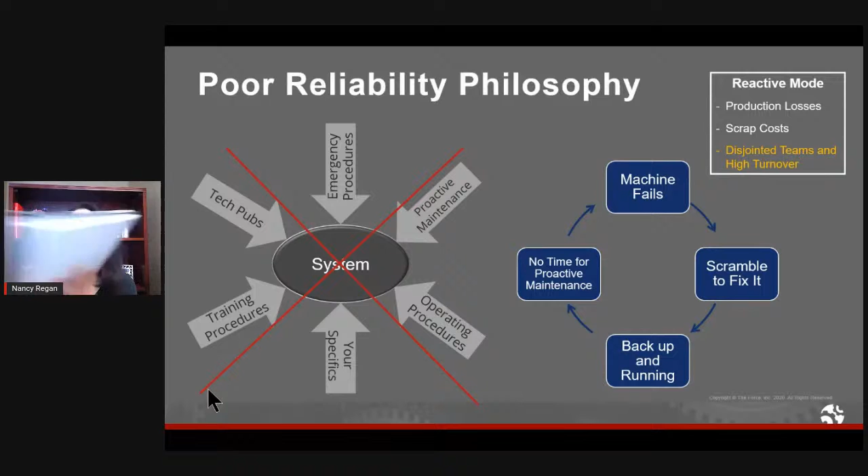Okay, so yesterday what we discussed is that reliability-centered maintenance is a philosophy, that it is not a maintenance program, it's not a software application, it is a philosophy that you can use to come up with your own failure management strategies for your equipment.

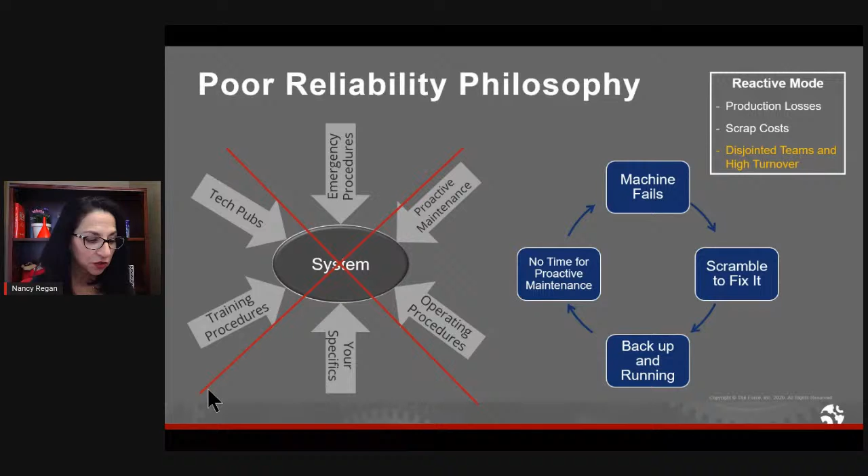And one of the things that we talked about is, why isn't reliability-centered maintenance used more widely? You know, we're celebrating the 42nd birthday of it, but I still come across people who maybe are just hearing about RCM, or maybe they've heard about it, but they don't quite understand the principles as they were originally intended to be implemented. And this is not their fault.

One of the reasons, I think, is because RCM has been done poorly at times over the years, and so sometimes RCM gets a bad rap. Put in the chat if you've heard like RCM takes too long, you don't get the results you need, etc. All that is not true. I can promise you that.

But the other reason is because of this. It's that reliability-centered maintenance takes time. It takes time, it takes commitment, and it takes resources. Now, can you do it cost effectively and efficiently? Yes, absolutely. But it isn't free. Just like anything, right? We know the laws of thermodynamics, there is no free lunch. If you want a return, then you have to make an investment. And reliability-centered maintenance is one of the best investments you can make for your equipment.

Something else we talked about is that you don't have to do reliability-centered maintenance on all of your equipment. You can just do it on select pieces of equipment. In fact, we all live in the real world, right? So if we're going to get real and serious, I'm not going to stand here and tell you you have to do RCM on all of your equipment, because you don't have the time and you don't have the resources to do it on everything. And we don't necessarily have to do RCM on everything to get benefit.

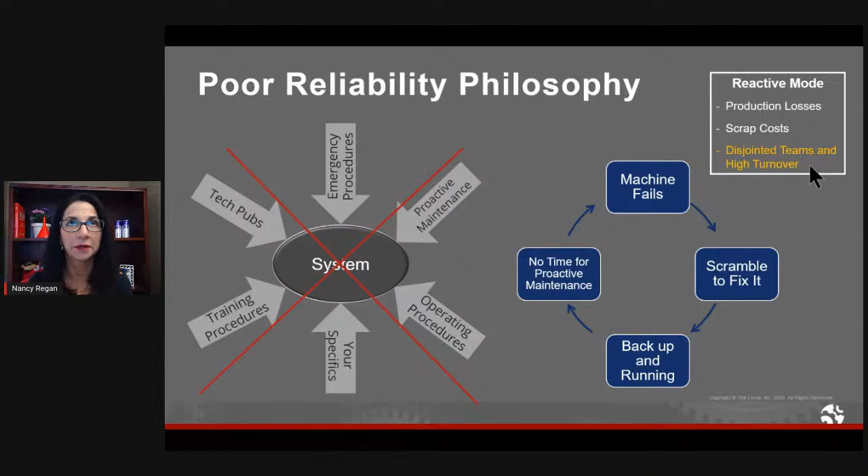But another thing, it isn't necessarily a physical thing that you can put on a balance sheet, but we end up with disjointed teams and high turnover, right? So we've got valuable staff members. They've got information in their head. They have an understanding about our organization, but the culture, right? We hear a lot about a reliability culture. We're all in this reactive mode. Everyone's running around. We're not taking care of reliability the way that we need. So then good people leave our organization and they take the information in their brains with them. So that's another big consequence of disjointed teams.

Now, when we take care of reliability the way we need to, when we have a good philosophy, and reliability-centered maintenance is part of that effective philosophy, then we get what we need from our equipment. And in a nutshell, that's what reliability is, right?

If our compressor is running and it does not chronically fail, if you ask somebody on the floor, hey, what do you think of that compressor? They'd probably say, you know what, it's pretty reliable. I mean, that's what reliability is. That's a very simple view of it. But I think it's very important to have a simple view of reliability, because then we can get into the weeds and get into the nuts and bolts of what we have to do. But that's what reliability is. It's getting what we need from our equipment.

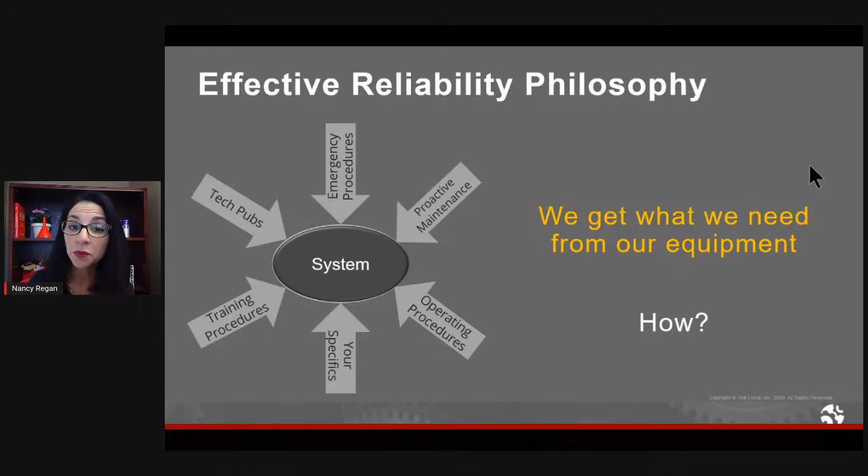So how do we do it? Well, reliability-centered maintenance is one effective way. It's one piece of the puzzle. It's not the answer for everything, but it's an important piece of the puzzle. Now, it consists of 7 steps that you can see here.

Oh, let me get my mouse right. I'm using 2 screens, and sometimes it gives me fits.

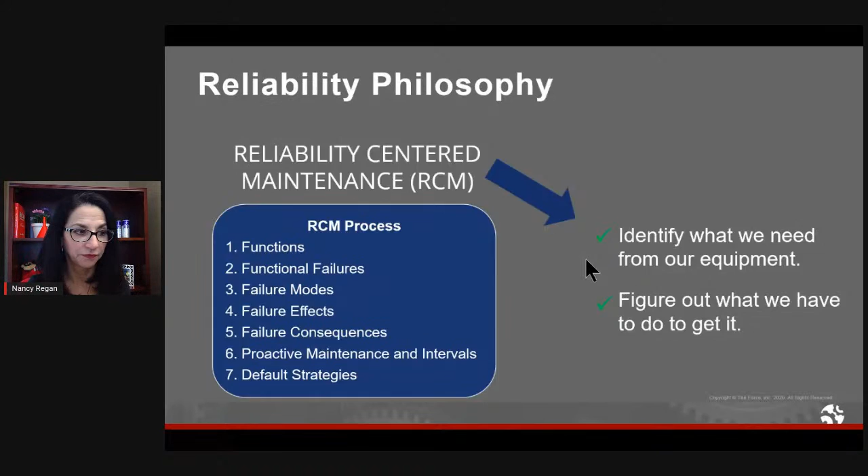There we go. You can see the 7 steps here, right? But if I were to tell you what RCM is in a nutshell, number 1, we use it to identify what we need from our equipment. In other words, we get very specific about the reliability that we need. And number 2, it helps us figure out what we have to do to get it. That's reliability-centered maintenance.

Now, why don't more organizations use it? Another reason is because it takes time. It takes investment. It takes resources. So a lot of people, when they don't understand it, they think of RCM, they think of proactive maintenance as a cost center and not a profit center. But here's how I'd like to boil it down. Just think of ourselves as human beings, right? And the way that we eat.

If we go through McDonald's every day for lunch or dinner because it's fast, because it's easy, and because it takes little effort on our part, if we eat a Big Mac today and a large fry and a Coke, it's not a big deal. But if we do that every day for lunch, maybe even after a week, it's not even a big deal. But as the months go by and as the years pile on, that's going to be very bad for our health, very bad for our weight, very bad for our psyche.

Now you're trying to put on your pants and they're too tight. I mean, nobody likes that feeling. That's just an ugly feeling. Then we feel badly about ourselves, and it's like everything just starts to spiral. It's the same thing with reliability, right? So making a salad takes longer to prepare. You have to wash the lettuce and peel the carrots and wash them. Same thing with the cucumbers and the celery. And I like to put apples in my salad. Maybe some fresh herbs, some fresh parsley. You've got to wash all of that.

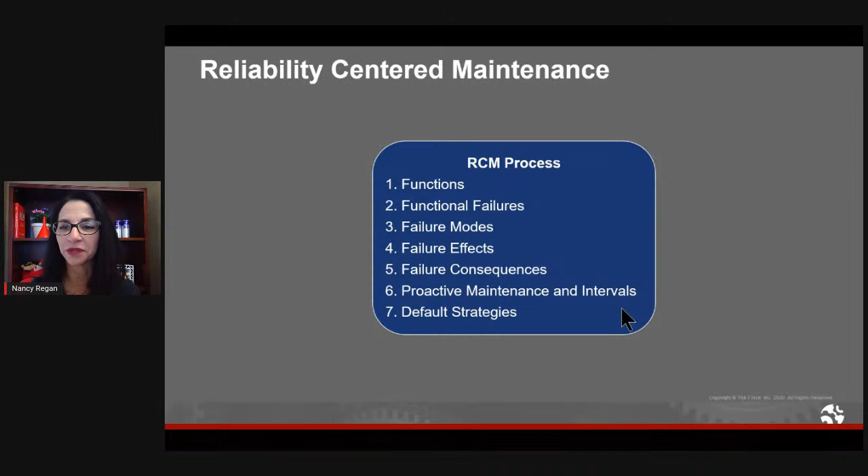Okay. So to debunk a few misconceptions, one of the questions yesterday is, what is the difference between FMEA, or failure modes and effects analysis, and RCM? Which one should I do? Here's the thing. RCM is one-stop shopping for a lot of things. Steps 1 through 4, functions, functional failures, failure modes, and failure effects, make up the FMEA. So if you're doing RCM correctly, then the requirement for an FMEA is largely satisfied. When we do step 5 in the RCM process, that's failure consequences, where we assess the consequences of each failure mode.

Well, steps 1 through 5 make up our FMECA, our failure modes, effects, and criticality analysis. And then embodied in step 6, when we figure out what proactive maintenance we should do, included in that is condition-based maintenance. So I also hear, should I do RCM or should I do CBM? Well, you see, when you do RCM correctly, you're already considering condition-based maintenance. So it's all wrapped up in it.

Now, something else that we talked about yesterday is I likened reliability-centered maintenance to a funnel. And I'd asked the question, have you ever tried to replenish your oil reservoir, or if you change your own oil, when you service the reservoir with oil, have you ever tried to do it without a funnel? I had to pull over one time and add oil into my 2014 Subaru, and I didn't have a funnel, and it was messy, right? Well, reliability-centered maintenance makes it easy for you to come up with a proactive maintenance that's technically the right thing to do and that is worth doing.

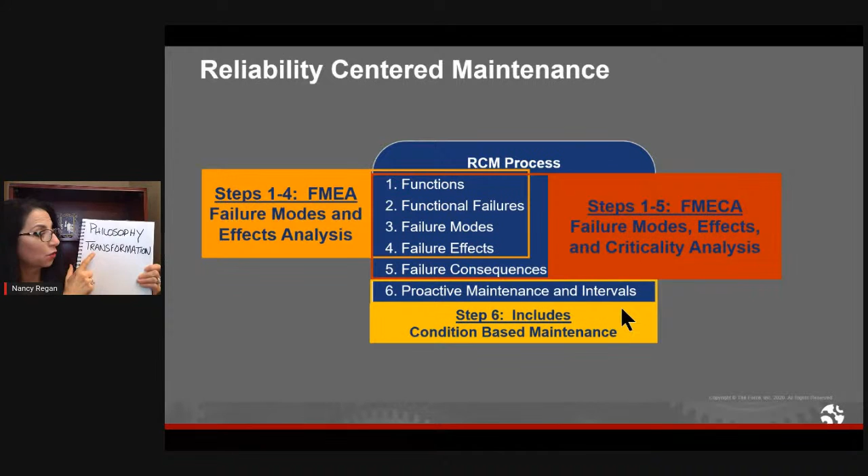Reliability-centered maintenance is the technical love of my life, and it is because it's just no joke. We talked about yesterday, the 2 words of the day were philosophy and transformation, and when you do RCM correctly, it can quite literally transform an organization. I've seen it firsthand, and I actually have an example to show you.

The way that I started doing reliability-centered maintenance, as I shared yesterday, is that I was a civilian employee with the Naval Air Systems Command, and one day in August 1997, my supervisor, Fred, called me into his office, and he said we were tasked to do reliability-centered maintenance because we needed to reduce our maintenance costs. So our reliability was okay, but we were spending way too much money on maintenance. So we started doing reliability-centered maintenance on our mobile support equipment. And our goal was to reduce maintenance.

Now, can RCM reduce maintenance? Yes, it can, if you are already doing way too much maintenance, or you're doing maintenance that you don't need to do or that you shouldn't do, okay? So if you are working in an environment where you're doing very little proactive maintenance, but you've got chronic failure, well, you may drastically increase how much maintenance you do, but then you may decrease your unplanned failures, and you will decrease all that other stuff like lost production costs. So it really depends on what your goal is and what your current circumstances are.

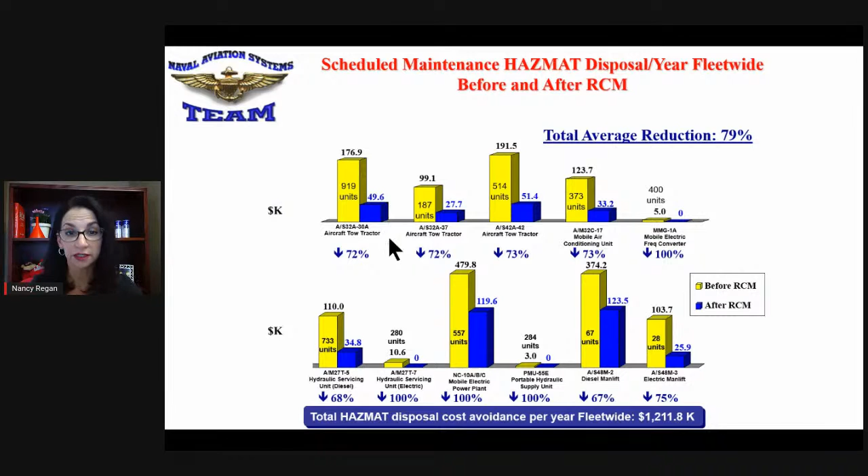And the point to be made here is that we didn't harm our reliability. We didn't have all sorts of chronic failure occurring because we reduced the maintenance. So really that was confirmation that we did it right, that we chose properly how to manage all of those different failure modes that we had analyzed. So that's just one quick case study, one that is near and dear to my heart because it's where I first started my RCM career and where I started to learn my craft.

Okay, let me share just something else with you. Something else to note is that another reason for the big reductions is that there were problems with the current maintenance plans, like they were typically written by the equipment manufacturer, and oftentimes the manufacturer doesn't know how often we use something or where we use something, right? So we always have to sanity check a manufacturer's recommendations.

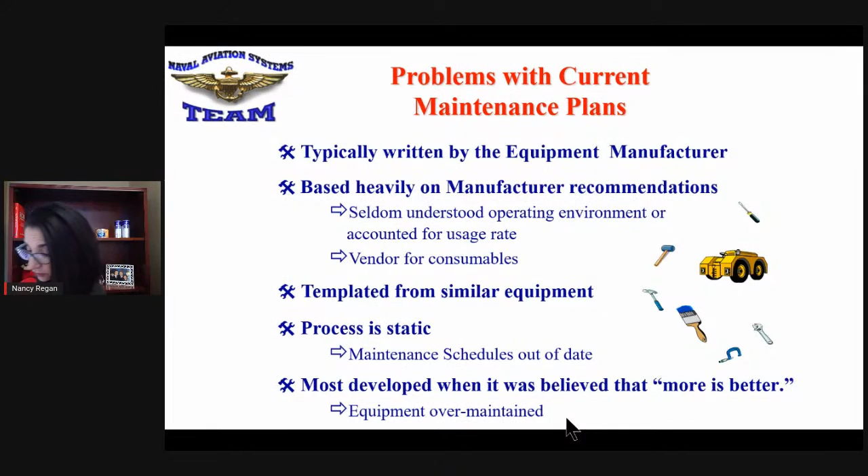Okay, let's see. And if I can just say something I'm super proud of, in 1999 we won the Logistics Team of the Year award, and in 2000 our team won the Department of Defense Value Engineering Award, and we were really excited about that one because that one was a really big deal.

So anyway, I say our team because another thing that we talked about yesterday is that when you do reliability-centered maintenance, the way to do it is with a facilitated working group approach, right? Because I've never seen any organization that has all of the historical data that they need to make meaningful decisions about physical assets. So whatever data you have, it's good to augment it with real world data. And that is the stuff that's in the minds of the equipment experts.

So this whole RCM success story or case study, I certainly do not mean to stand here and say, oh, this was all me, because I was just the facilitator. This was a huge team effort, right? From upper management, middle management, all the way to our RCM team, and then our working group members, the people in the fleet who participated. It was an incredible effort, and like I said, it's still going on.

But the key to reliability, even if you're not doing RCM, but maybe you're doing another process, one of the keys is to involve the right people, right? The people who are in the field, they know the equipment, and they know the operating environment. It's absolutely essential.

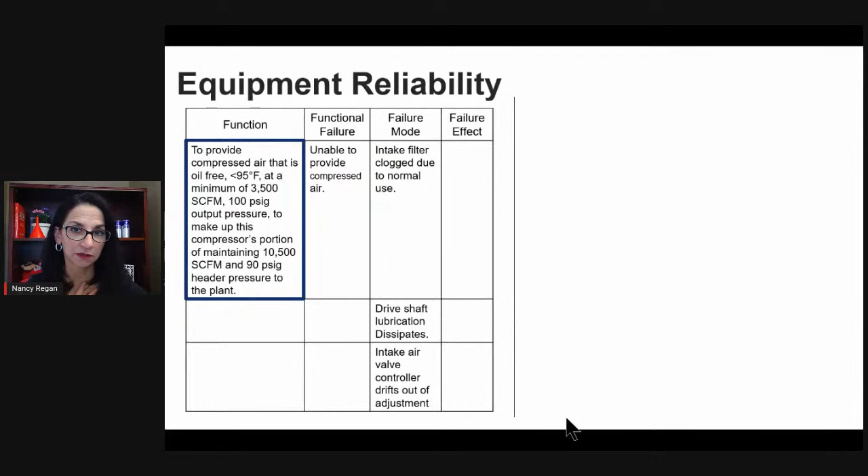Like our intake filter could get clogged, our drive shaft lubrication could dissipate, our air valve controller could drift out of adjustment, etc. So as responsible custodians, we figure out what we want, and then we figure out what would cause us not to get it. But really, as human beings, we can do the same thing. Now, you can call it whatever you want, a goal, a mission, an objective. You can call it your heart's desire. It doesn't matter what you call it.

Now, I know one of mine is to promulgate the principles of reliability-centered maintenance. That's one of my professional objectives, or I personally call it my mission. I feel that one of my missions in this lifetime is to just get as good as I can about RCM and share what I know. But the problem is that as human beings, we are also subject to failure modes. Now, I call these invisible obstacles, and they're invisible because we can't see them, but boy, do we feel them.

But I first want to start out by talking about this. I heard about this concept. I was surfing the internet one day, and sometimes we get inspiration from the most unlikely places, and I happened upon a presentation by a Hindu priest named Brother Anandamoy. Something he said I just never forgot: he talked about that in life there is duality. And as human beings, we have to deal with this duality. There's positive and there's negative. There's health and illness. There is good and bad. So we constantly have to be dealing with this duality.